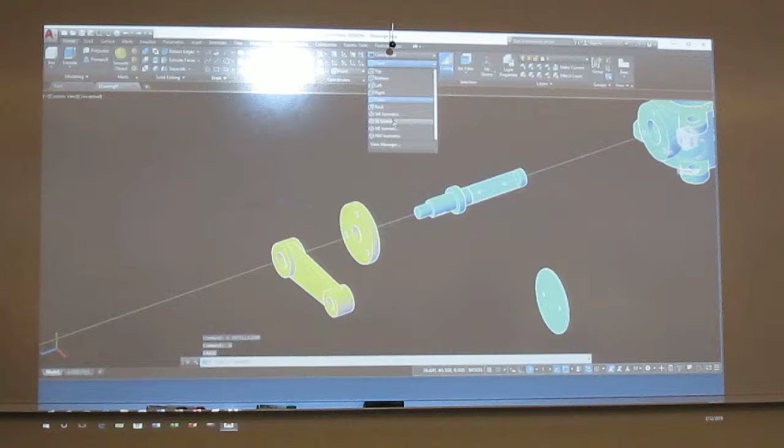Something on there. Okay, right here. And all you have to do now, folks, is do some moving. So I'm going to move, and I'll just go from there, because I want this a little closer. So I'll use my nearest again, and I want it about right there.

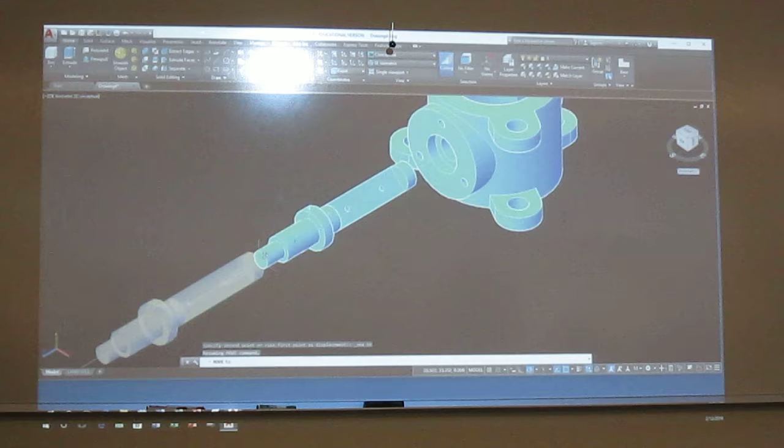And I'm going to do a move. Now that I'm on my orientation, right? Need my front one. And you're going to have to play with this a little bit, because you do center lines to show where all this stuff is.

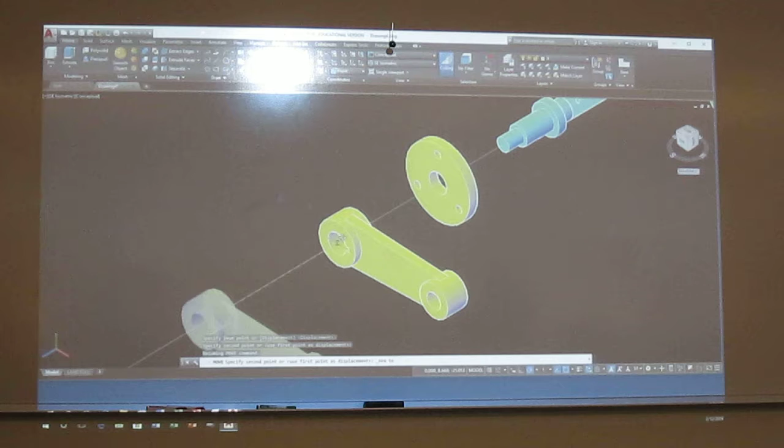And that's going to be somewhere about right there. All right, so I've got that. Now, to get this guy, I'm going to have to go to a right side view, I believe.

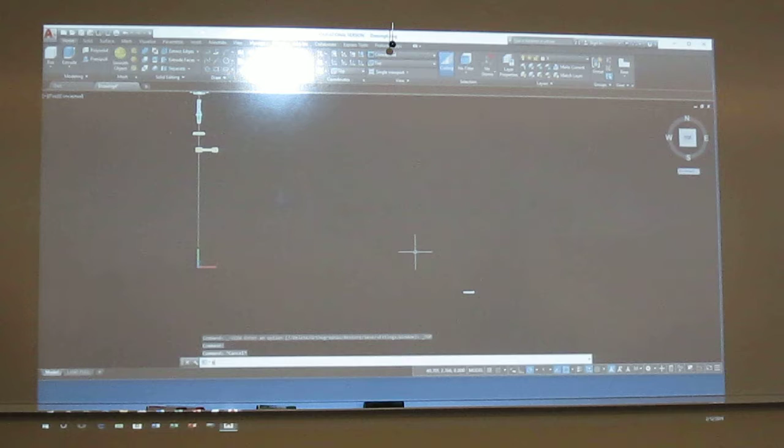No, I need to go to top view. And I'm going to rotate this. And I'll rotate it 90. Now, let me just move it a little closer so I can get it up here.

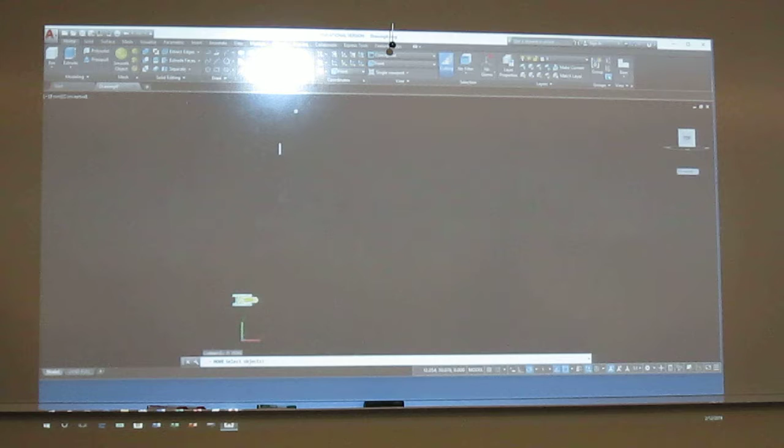And now I'm going to go back to my front view. We'll move on that, get it a little closer. Remember that angle is 45 degrees. So I'm going to now rotate this thing, and I'm going to rotate it 45. And then I'm just going to kind of move it to where it looks good.

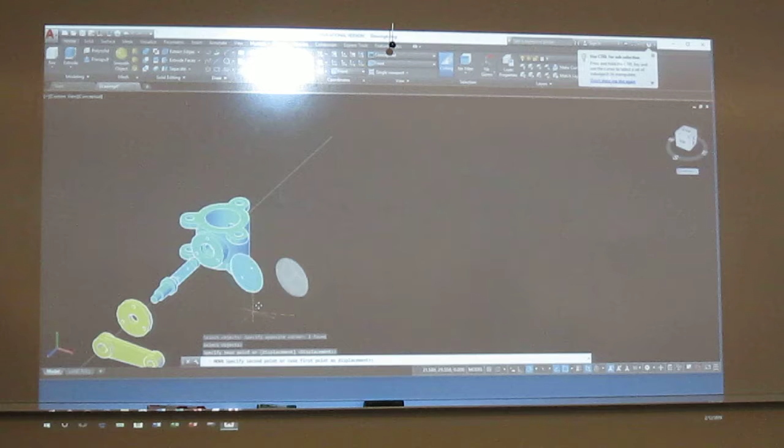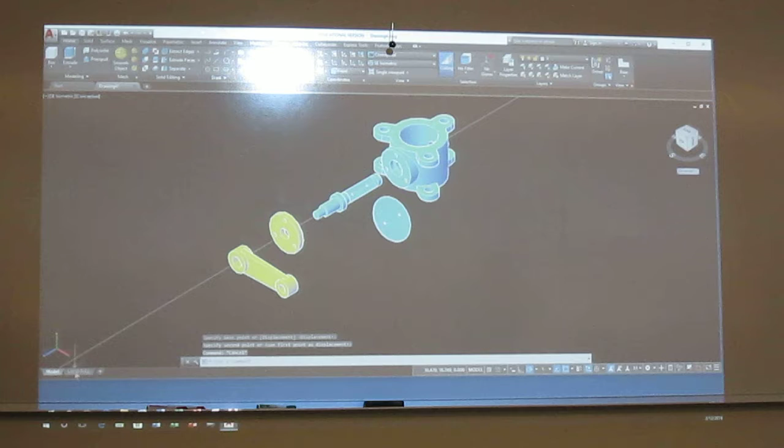Now, once I like this, I'm going to go to paper space, delete my viewport. I'm doing view base, from model. And I'm going to set my orientation.

And southeast was the orientation - no, southwest it looks like. No, that's not working either. North - how about north? Hey, that looks good right there.

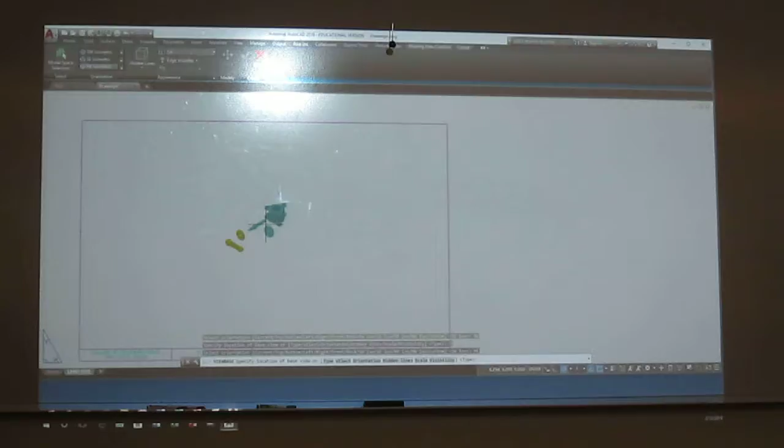For some reason, this is really small. We go to scale. I'm going to do 1. There you go. And that looks pretty good, right about there.

Done? Now, keep in mind, they hate it when that happens, huh?

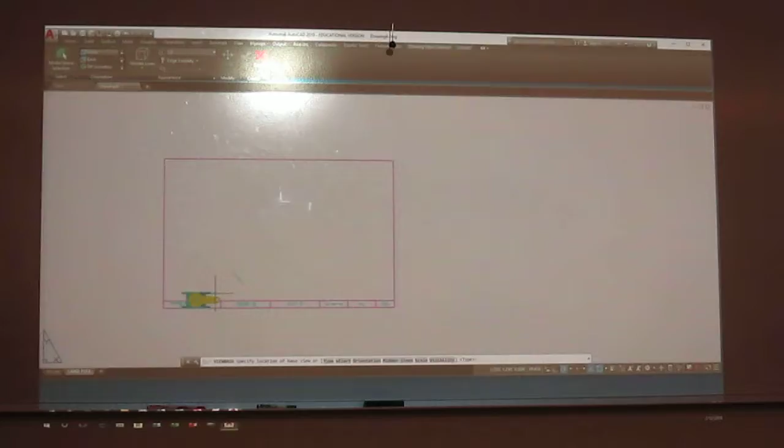All right, scale is 1. Orientation, I think northeast was the best one. Okay, so I'm going to place that character. I'm going to enter twice to get it.

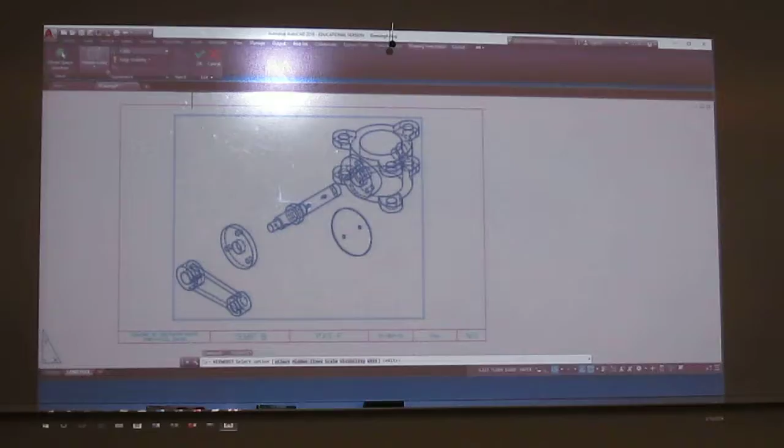Now, double click it. I'm going to take off all my hidden lines, all I want is visibles, because it's an isometric mode. Okay, I think that's it. Now, I still need to get my layers, so all my line types are right.

And now I'm coming in and I'm doing my center lines. So to draw my center lines, I'm going to come in and go from center to center, center to center.

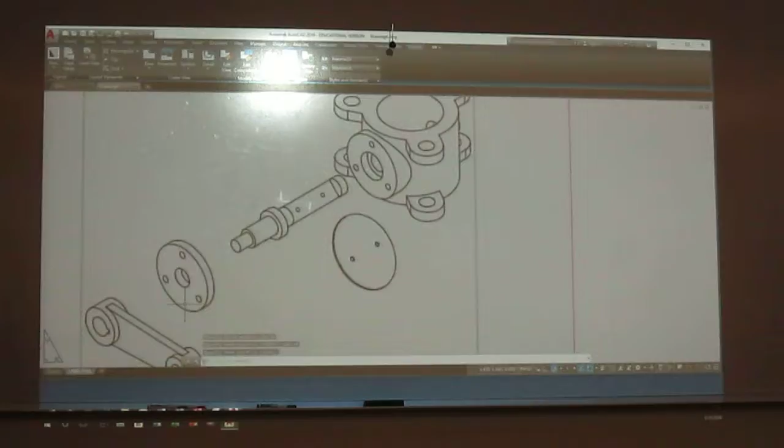And you could just do trims on these and draw one all the way if you wanted to. To center. Now, when you build these center lines, like right here, it doesn't go over the top of this object, right? Okay, so all I do is just come in and eyeball it.

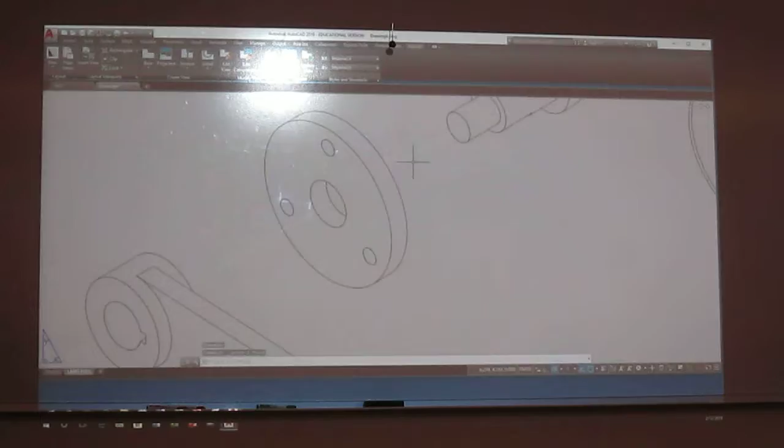And then let's trim that back. Okay, so that's all I really want for my center line. Just make it look good is what you're looking for here, folks. There should be a little bit of a gap, like this one here.

I'm just going to grab that. If you can get the orientation to stay, that's fine. Just do what you need to do to make it look good.

When you go to do these right here, these guys, I'm going to go from center. And when you do these, you can go past. Okay, so let me say I want to go here, and then I'll drop straight down, and then come back to the center.

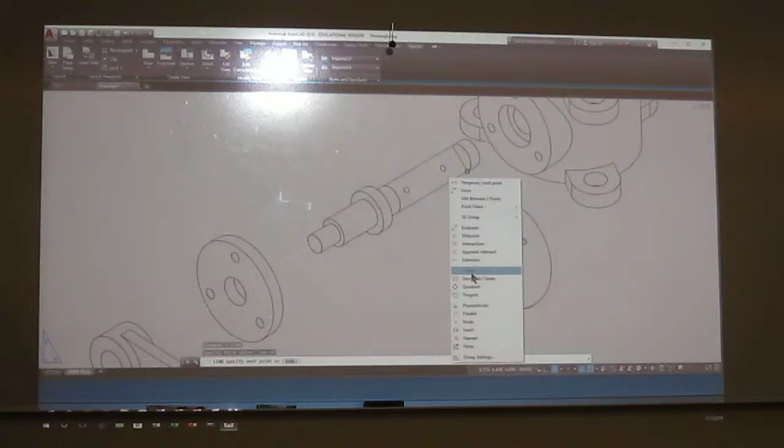I don't want any snaps here. Yeah, it wasn't a lot, I just put it there. And it will be pretty obvious what goes on, as long as you portray the picture that hole lines up with that hole.

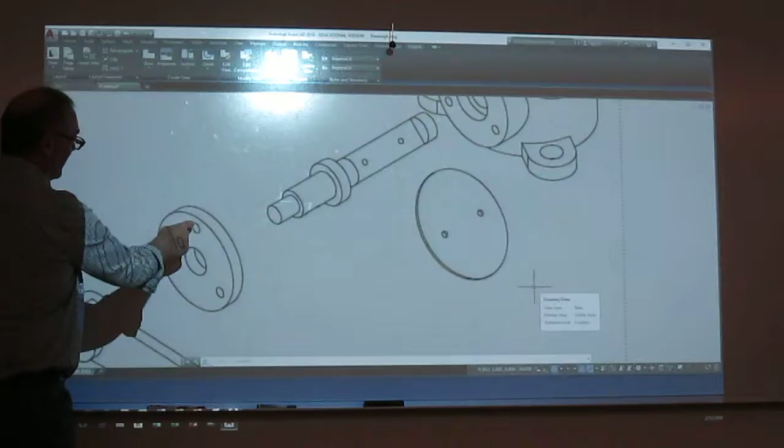Okay, and on the retainer, you need a line from here that matches that top hole, one from here that matches that one, one from here that matches that one. And then just give them some center line breaks, same way we've always done, and you're ready to print this thing.

We have to dimension that one. No, this is an assembly drawing. I did ask for a table, a parts list.

Okay, all right, so it took me an hour and 20 minutes, a little longer than I thought, but we basically have drawn everything in here. The key is knowing my shapes, knowing where my datums were, and then you saw how everything just kind of fell into place at that point.

Now certainly, do I expect that you can do this in an hour? No, I've been drawing for 30 years. If you expect that you're going to match me on how I draw it, you're fooling yourself. You will be able to do something like this a year from now, in an hour, but you can't yet, I understand that. But if you go with datums and shapes, you will get them done and they'll be accurate.

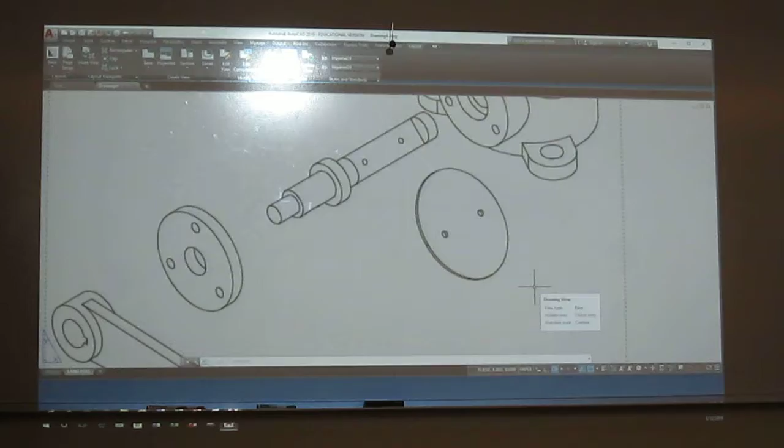Yes? So now this file, if we save it and transfer this file to another computer, will we lose all the data? Yep, because it's XREF. So what can we do to take it all and work on another computer?

Yeah, you can copy the whole directory. That's why I asked you to put these in a whole directory. So we need the folder. Just to show you, yeah.

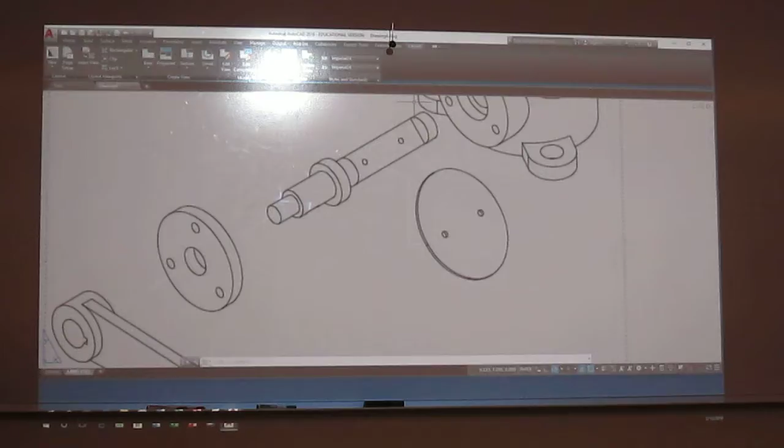See that, 149 drawings. So I've got a folder here called Butterfly Valve. Every single file is in there. If I take this file folder, everything in here, and I just copy the file folder to any machine...

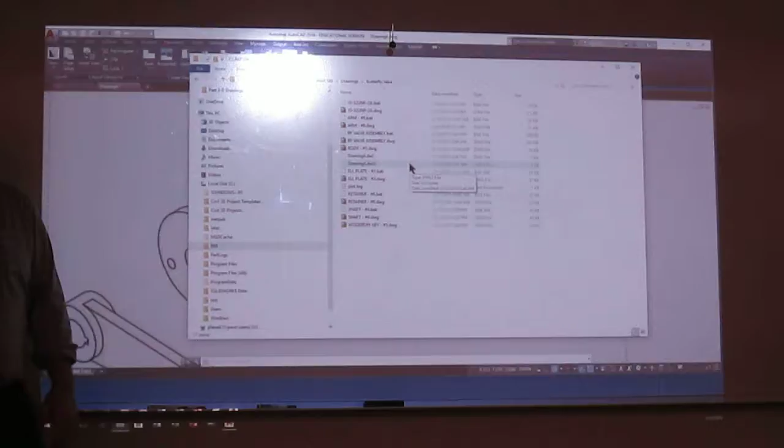It should retain the XREF paths because it's going from the same folder. And it doesn't matter where we copy it, on desktop or wherever. I'm not going to say it doesn't, but it shouldn't. I've had mixed results with that. Sometimes you might have to redefine a path, but you'll have all your files there, and you might have to redefine the path in the XREF dialog box. But it should work, in theory that's the way it's supposed to work.

But you're messing with Windows too here, right? Remember, you're messing with two separate things. You got AutoCAD that's trying to do something, you got Windows that's trying to do something. They don't mesh in every single environment.

So, Majed, it should work for you because I know you do a bunch of homework at home on your laptop. Bring the file folder in, it should pop right up and be fine. If it doesn't, we can reassign paths. Okay?